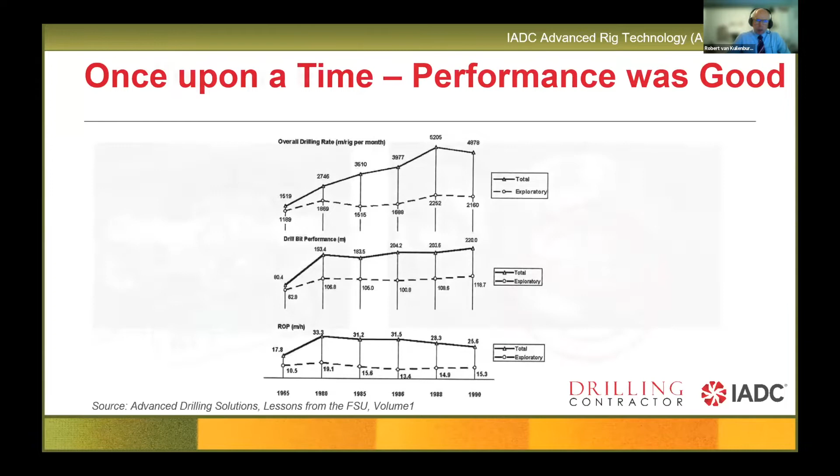So with that out of the way - once upon a time, performance was good, with drill bits lasting a whopping about 721 feet per run, and grading was easy. Now performance is around 5 times better. However, grading became simpler... well, not really, I guess.

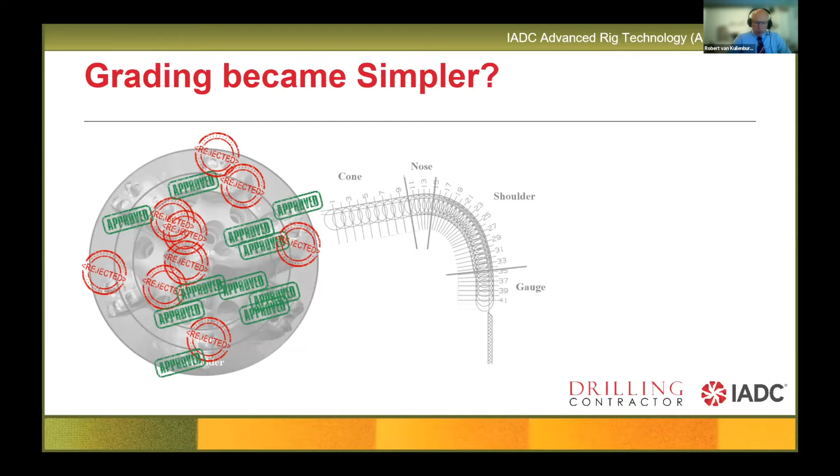So about 2 years ago, IADC, with the enthusiastic support of Paul Pastusek - I'm not sure if it was the other way around - recognized that the existing bit dull grading classification needed to get a major upgrade to prepare for 2022 and beyond. The identified limitations of the current IADC bit dull grading revolve around 5 core areas.

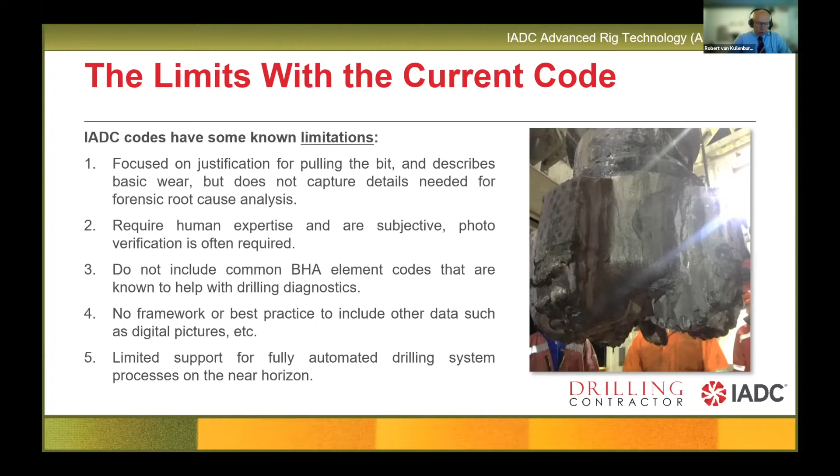It was heavily focused on justification of pulling and not on the root causes. A heavy reliance on human expertise, not including common bottom hole elements, no framework for metadata inclusion, and no or limited support for automated drilling systems. In short, the current system just didn't cut it in today's environment.

So in 2021, the IADC bit dull grading upgrade project set out with 4 major objectives to improve on the 5 identified limitations: support root cause analysis, and by virtue of this, continuous improvement; eliminate subjectivity, or the human element in most cases; support both human and automated systems, and fully embrace the digital world.

And as a note, the improved code set will be backwards compatible with the existing grading system, although it will then lose a lot of its detailed analysis functionality there.

So where are we in the timeline? The existing standards were created in 1987 and then revised in 1992. For 29 years, nothing really changed until January 2021, when this project kicked off with the first virtual panel meeting. And in August 2021, an intermediate update was presented.

The plan is to put the new standards out for trials mid-2022, and by the end of this year, have a final consolidated document out for comments.

And you might ask, oh, it is all virtual meetings. Well, no, you will see that in the next hour and a half. In the background, there have been more than 100 sessions on the sub-teams, which I will present later on.

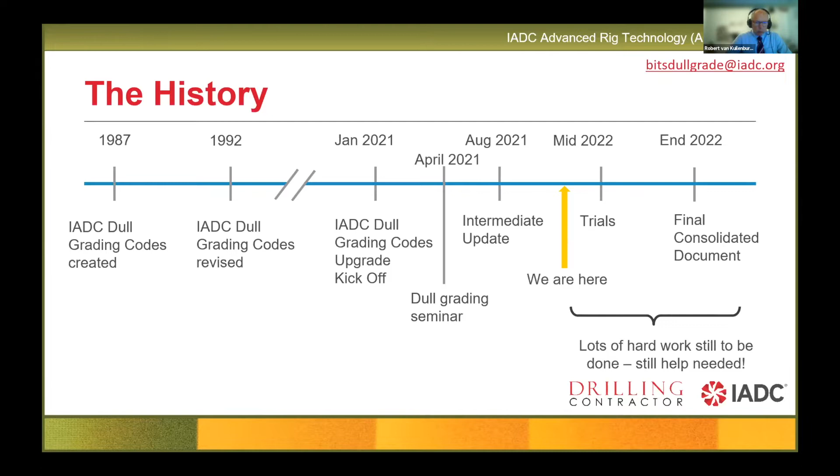A major part of the project was and still is education. I think I can speak for all volunteers that everyone learned a lot along the way. And you will notice this as well in all the presentations of the teams later on, that really high quality work has been delivered.

So the work has been divided into 4 groups: drill bits, bottom hole assemblies, case studies, data storage and retrieval. The drill bits team was led by Dustin Lyles, Tom Roberts, and Chris Probst. The bottom hole assembly team was led by Paul Neal, Roland Ilerhaus, and Jim Oberkirchen.

Case studies team was led by Willie Watson, Fred Dupree, Isabel Witt-During, Rafet Abbas, and Ty Cunningham. The data storage and retrieval effort was led by David Shackleton, Kyle Grant, James Ney, Nathan Zanero, Daryl Fett, Tartan Collier, and Jonathan Sharp. And deliberately, the leadership team bar has been placed underneath the teams.

The teams is where the work is actually being done. The leadership team just provides the proper foundations and ensures that there are minimal overlaps in the work. The leadership team comprises of Paul Pastusek, Dustin Deschel, Robert McMillan, and myself, Robert van Kallenberg.

Do we have industry support? I might be inclined to say we do. This is one of the truly collaborative efforts in the industry today.

So deliverables of the project can be placed into 3 buckets: outreach and education, codification, and digital guidelines. This year, we will see a lot of effort focused on the outreach and education. Writing a standard is one thing, but actually getting it generally accepted by the industry takes a lot of time.

Diving a little bit more into the outreach, you can see we have been quite busy, and I can invite you to the IADC SPE International Drilling Conference and Exhibition, where this group is presenting 3 papers, and more are planned this year. There are also preliminary thoughts on widening the outreach to universities and colleges as well.

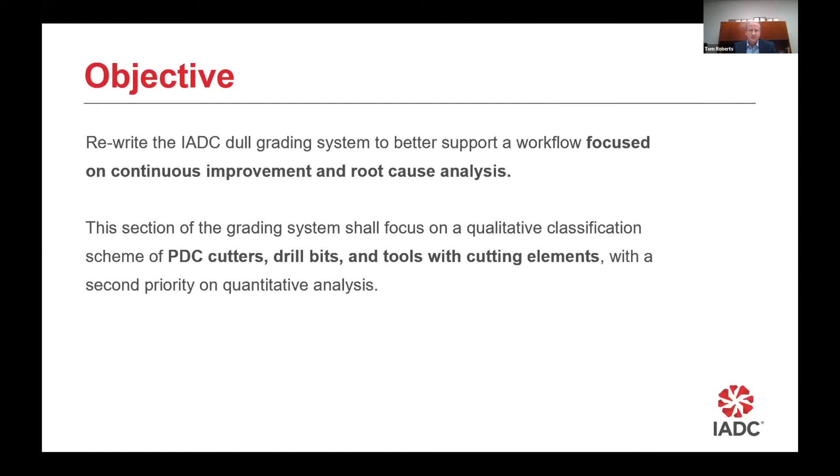So our objective was to really rewrite the IADC dull grading system, better understand and support the workflow focused on continuous improvement and root cause analysis. This section of the grading system will focus on a qualitative classification scheme, focused on PDC cutters, drill bits, and tools with cutting elements, with a secondary priority on quantitative analysis.

When we think about the IADC system today, it's been almost 3 decades since we've done a major rewrite of the system. Back then, the market was very different. Roller cones were king of performance drilling, probably 80%, and PDC drill bits were in their infancy. Over time the tables have turned, and PDC drill bits now lead at least 80% of the market.

So our focus, quite rightly, was on PDC drill bits. However, we want to make it compatible with roller cones, reamers, under reamers, hybrids, etc. We believe the existing system of grades works very well for roller cones, but there are a lot of new upgrades in technology to bring PDC good forensic analysis.

So again, just to highlight, we've defined a set of standards. We've focused on the cutter classification codes and documenting those codes. I'm not going to go through all of these points here, but you can see some of the areas that were laid out from the charter statement.

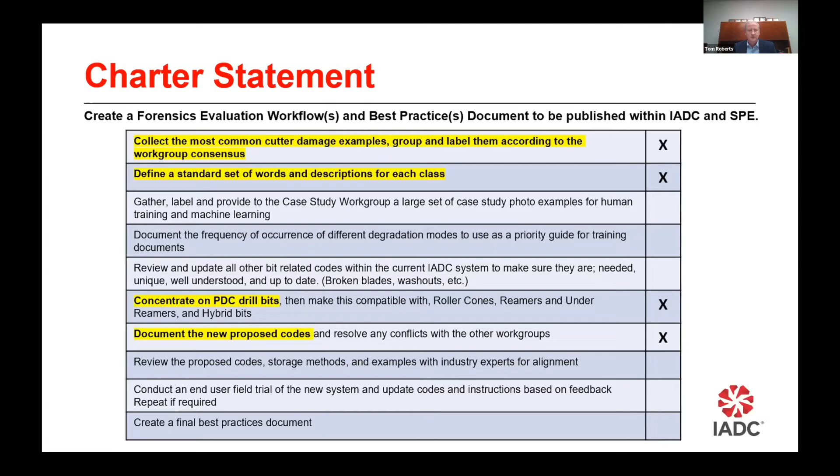This really is just a quick overview of where we are right now. We had a large group of subject matter experts kicked off at the beginning of 2021. We've had around 20 meetings, 17 with the SMEs, and at least 3 with the leadership group: Paul, Dustin, Robert, and Robin.

We've had really good attendance at these meetings, typically about 30 to 50 on each. These were run every 2 weeks, early morning. And as you could expect with so many subject matter experts, there are some strong feelings or strong opinions, one way or another.

So we made extensive use of polling. This helped us get the general opinion direction that we needed to go. An example here I'd just like to share with you.

At one point, there was a lot of talk about forensics, and sometimes it's not as easy as we all believe it will be. A lot of this, of course, is to find the root cause and figure out what's going on. In this situation, we would poll the group and ask: do they believe this is mechanical impact, thermal, or a combination of both? Quite rightly, the result shown by the orange bar, the majority said this was thermal.

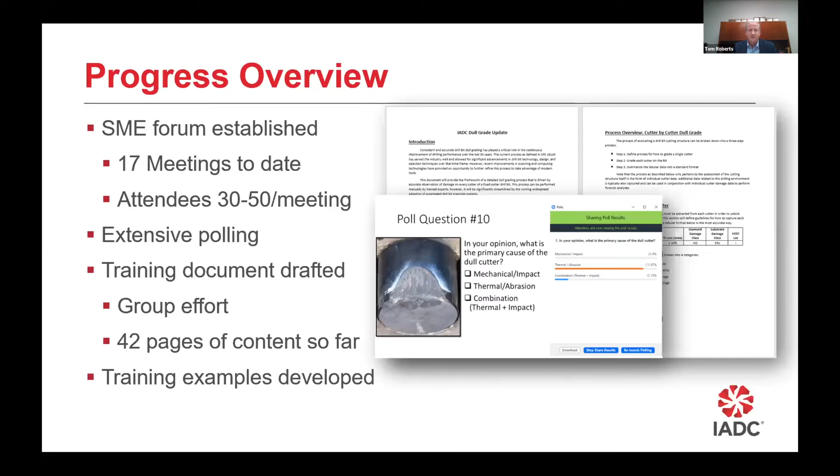So the point of this type of polling really was to show that it's very important to get to the root cause. A lot of energy and effort needs to be put into that ahead of time to really understand what we're dealing with. This will allow us to make the best decisions moving forward, what we do next.

So in terms of where we are right now, we've created a training document. This has been drafted with, and I'd like to really thank, the subject matter experts we've had. It's been a group effort for sure, and I'll let Dustin talk a little more about that. We have about 42 pages of content so far, and right now we're working on training examples so we can utilize some of the new classification codes that have been created.

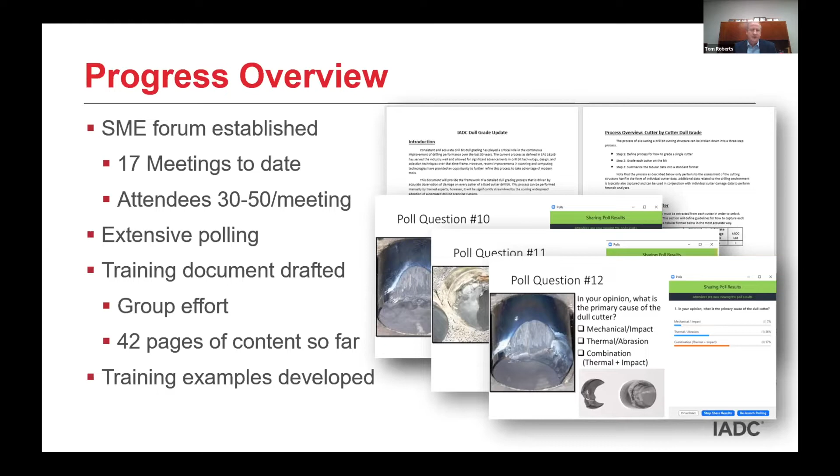Then we have automated systems being developed to machine learn using cameras and scanners. Even iPhone apps are being developed where they can photograph the drill bit, create a 3D image of that bit, and understand the grades. So these systems are being developed.

There's been a lot of work in this area in the last couple of years, and a lot of progress. I'd say in the next couple of years you're going to hear a lot more about these. They're developing fast and are very close, though a lot of refinements are still necessary.

And then finally, there's the shop grade. Again, this is really what we do today in terms of more advanced forensic analysis, where we do the typical cutter by cutter, individual cutter data analysis. So both the machine learning and the shop grade do the cutter by cutter, which will feed through to an IADC shop grade.

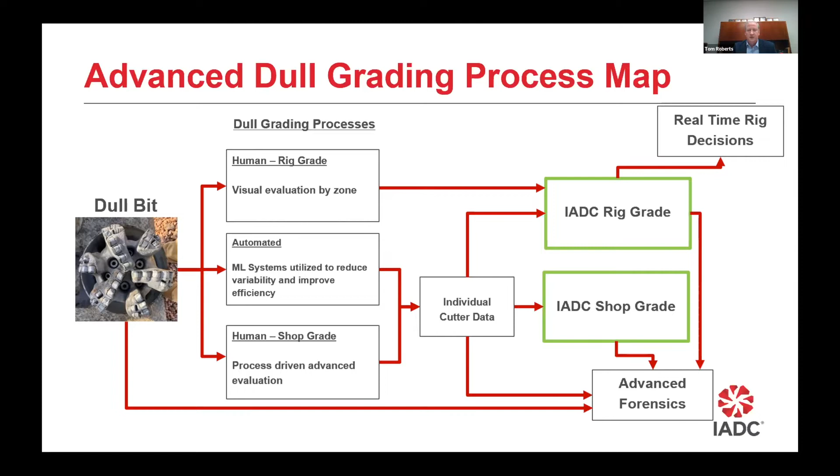We're looking to split the grade into a rig grade, which is still similar to what we do today in terms of grading at the rig, and a more accurate forensic shop grade. The importance of the two is that the rig grade provides real-time decision making and is still extremely important, but both will come together in terms of advanced forensics.

Like I said, we're working on these training examples right now. If we walk through the three steps, the idea is to grade every cutter that we're dealing with for greater accuracy, starting by defining the process of how we grade a single cutter.

Dustin will be talking about some of the key achievements and changes we've made. Then we move on to grading this into the chart you see, the second stage on the right here, looking at the percentage of diamond table that's been lost in this column.

Then we have the new diamond classification codes being provided, showing whether it's a worn cutter or damaged by spalling, etc. We also have new classification codes for substrate damage, which can be related to corrosion, erosion, etc. And then we have the IADC location relating to the existing system.

From this, we can summarize the results into the cutter damage severity, as you see in the third section below. This gives us the overview, the zone - the cone, nose, shoulder, and gauge - and then whether we're looking at the primary cutting damage category or the secondary damage classification.

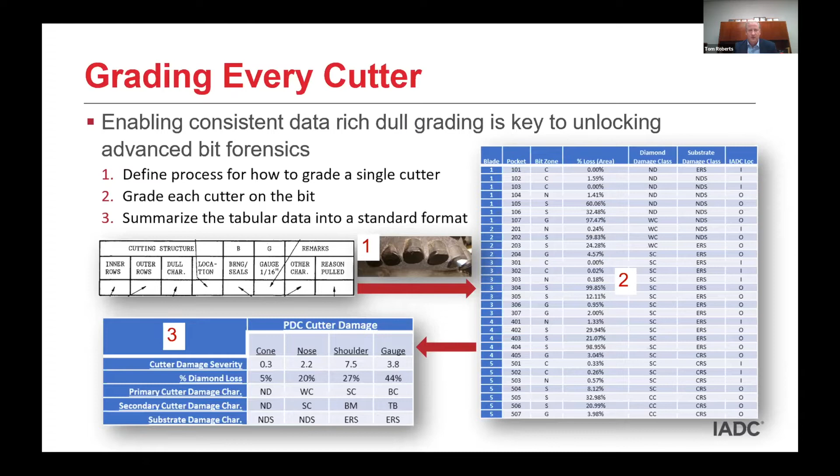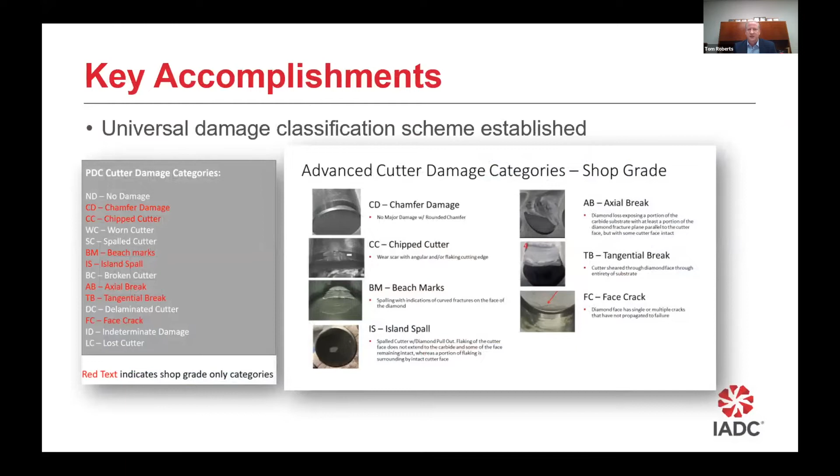Thanks so much, Tom, and good morning to everybody. So we'll keep rolling here. I'd like to hit on some of the key accomplishments to date for the drill bit group. One of our first tasks was to completely overhaul the damage classifications or categories.

The old system we all know of was updated in 1987 to incorporate fixed cutter bits. It listed 26 dull characteristics, but those were very general, and the majority were actually more focused on roller cone bits and did not do a very good job of giving us granularity or detail on the types of damage predominantly experienced on PDC diamond table.

So our newly proposed damage categories are focused solely on PDC damage. This is not a comprehensive list we're showing here, but it does highlight some of the more noteworthy and new categories. You'll also note the more detailed shop grade categories in red.

As Tom mentioned, we have the rig grade and the shop grade. The idea, at least initially and subject to change as we do our field trials, is that we don't have as comprehensive a list at the rig level, so as not to overwhelm them. But as we get into the shop grade, we have a more comprehensive list that gives a high level of detail and a lot of options for the automated machine vision based systems, as well as when we have engineers evaluating dull bits at their local facilities.

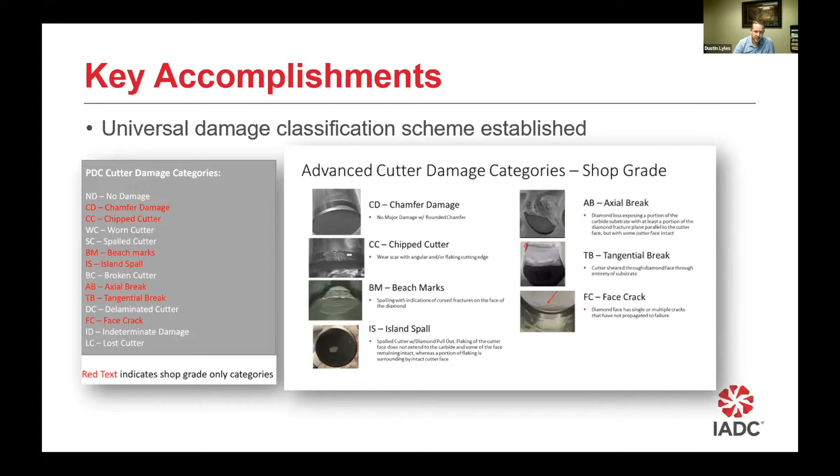A couple others that are interesting there - face cracks, and then the beach marks, which have a very specific shape to the type of spalling you're seeing. That's indicative of the type of loading that would be seen. So these are some of the more noteworthy damage classifications, not the exhaustive list, and we're continuing to develop and will likely iterate and improve upon these and add additional categories as we get into the field trial stage.

Thank you, Tom. Moving on, another key accomplishment here would be looking at the wear severity measurement system, as well as including a category specifically to evaluate the substrates on the PDC cutters.

We also included eroded/corroded substrate because a lot of times we see that goes hand in hand, especially in a lot of West Texas applications today. And then leaving in the heat checked substrate, as well as a category for no damage to substrate, which is also important - we want to know when there's damage, we want to know when there's not.

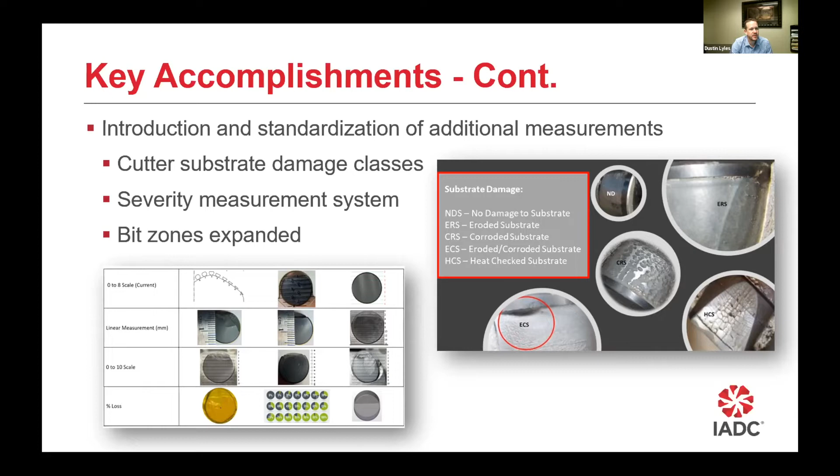Next, we'll transition into bit zones.

I'm going to get into subgroups a little bit more in a subsequent slide, but the majority of this work was done predominantly by one of our subgroups. And it, I think, is another really critical component to improving our understanding of drill bit damage and driving to that root cause failure analysis.

We typically, or historically, used an inner 2/3 to outer 1/3 system, which was very applicable to roller cones and makes sense, but was really not very applicable to a PDC bit and didn't do a good job of allowing us to understand what type of drilling dysfunction or loading would have caused damage in specific portions of the profile. So we're now transitioning to 4 sections, going from inner-outer to now cone, nose, shoulder, and gauge.

The cone being that arc or that line in the center, and then the nose being, if you were to place a clipboard or a flat object on the face of the bit, it would be the cutters on each blade that would touch that flat object. So really the best way to go about this would be to have that flat object on top of the drill bit, identify your nose cutters, move further out, identify the gauge as the first cutter aligned with the top of the gauge pad, or running parallel effectively to the gauge pad.

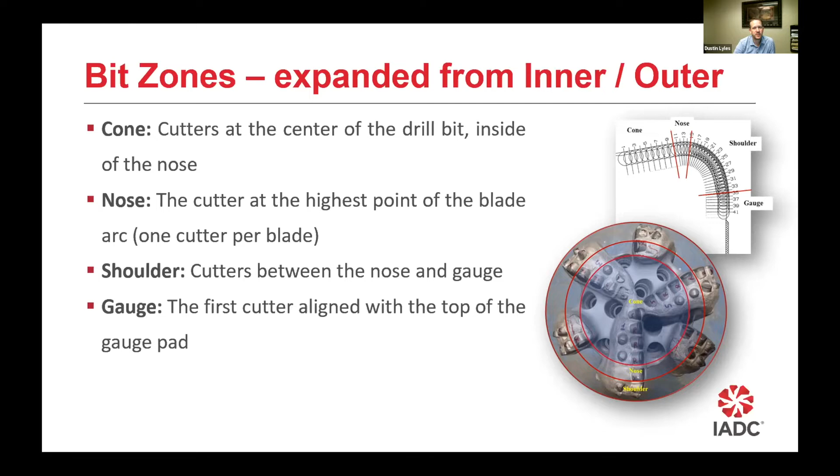But we believe this type of improved granularity into the drill bit zones will give additional color and feed that digital feedback loop to drive to root cause forensic analysis.

All right, so on the additional considerations and subgroups, as we mentioned, we had an extensive subject matter that needed to be addressed within the bit group, and we decided it was really too much work for us to take on just within the meeting. So we divided that up. We actually ended up with a total of 10 subgroups made up of 19 individuals.

For the sake of time today, I'm not going to go through that list of names, but you know who you are, and we want to tell you we sincerely and greatly appreciate your participation. Without you all, we would not have made the progress that we have to date. The 42 pages worth of documentation that Tom mentioned earlier is in large part thanks to these subgroups. So thank you all for that, and we will continue to deploy that model, splitting up this work.

So just to hit on a few of these, we've already kind of gone over the drill bit zone definitions. Shaped cutter compatibility was obviously a big one. We know in the industry today, over the past 3 to 5 years, the utilization and deployment of shaped cutters has increased substantially, and so we have to make sure that the new system can adopt and integrate wear severity and damage classifications for all varieties, of which there are an extensive amount in regard to geometries being run out there today.

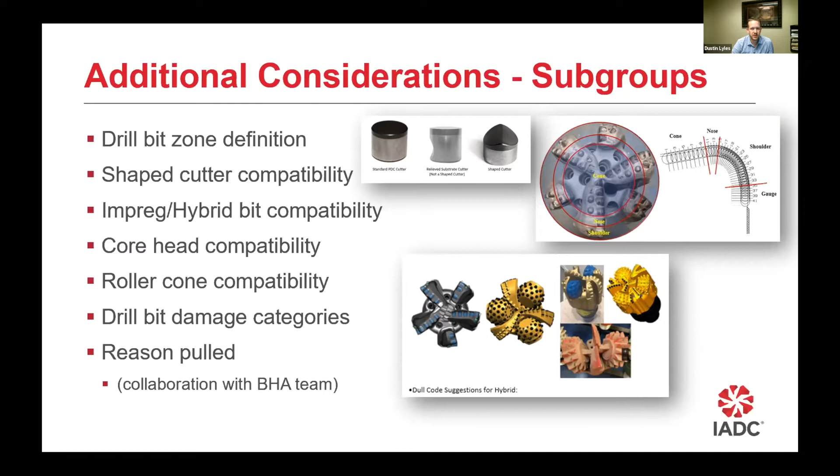We also had a subgroup that was specifically focused on drill bit damage categories. And then the last one shown there is reason pulled, which is in collaboration with the BHA team, and Paul Neal will be talking about that in a subsequent slide deck.

So to end, next steps. First, as Tom mentioned, we've been working in the background on the 6 training set. We will be moving forward with field trials towards the middle of this year. To date, we have about 9 bits set up to run through testing, and get everybody to try to grade these on a cutter by cutter basis, as Tom showed earlier, using the damage categories and wear severity measurement system we previously discussed. After that, we'll take whatever feedback we get, revise, and continue testing.

We'll do some field testing. We'll do testing within shop type environments, so at the bit companies or BHA companies, and get that feedback, which will be critical for us. We want to make sure we've had every opportunity to gain feedback and improve upon it before we finalize.

After that, we'll review the instructions, update as needed, and we're going to be working extensively—we've already started discussions with the data management team to develop the digital interface for the daily drilling reports. With this new system, we're going to need a way to capture that data digitally, and that's where we'll have a new interface to ensure all the desired fields are in an appropriate format that works for everybody out there.

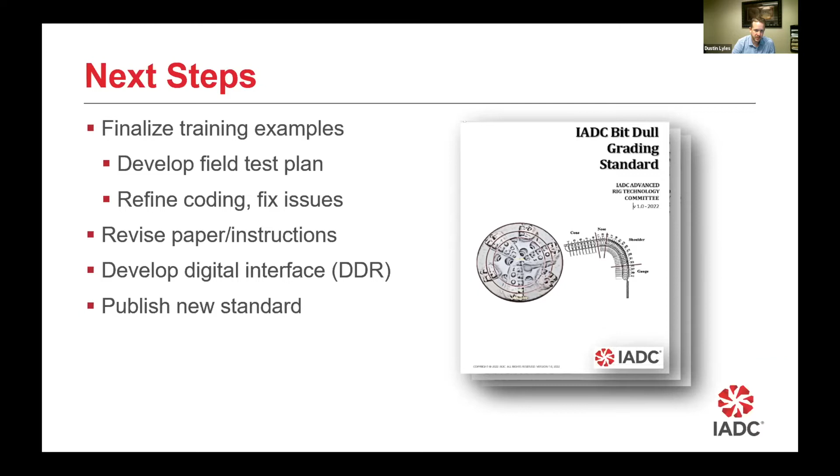From that, we'll move towards publishing the new standard. As you can see there to the right, we borrowed an image from Robert's presentation to show what that will look like as we move forward. So we're looking forward to that, and we appreciate all the support and help from everybody thus far. We look forward to the continued work on this project.

And so at that point, that's all we've got on the bit side, and we'll move it on over to Paul Neal with the BHA group. Thank you all very much.

Good morning, everyone, thank you for joining us today. My name is Paul Neal, and I'll be presenting on behalf of the BHA group this morning. Our group has quite a good spread of different parts of the industry. We've got about 30 members assigned to the group. We have people from the service company side, the manufacturing side, operator side, contractor side, and we're spread across about 7 different countries, so we've got a pretty good spread of people supporting this initiative.

We're really excited to show you what we've got today and what we've been working on for the last 9 or 10 months. We believe there's good work done. We believe the initiative is good, and it's going to be a tremendous help, not only as a diagnostic tool to evaluate the condition of the BHA after it's been run, but also as a tool to help understand what's happening downhole and bring pieces of the puzzle on how we can drill more efficiently.

So just briefly, today's agenda: first, we're going to talk about the objective we're trying to accomplish with this initiative. We'll briefly discuss the charter, which is what we use to drive direction when conducting our meetings. From there, I'll discuss the work group structure, which will give you an oversight on how we divided up the BHA, and subsequently the teams that were built to create those codes. From there, we'll go into detail on the coding structure itself, giving insight on how we're going to grade and what the grading system will look like.

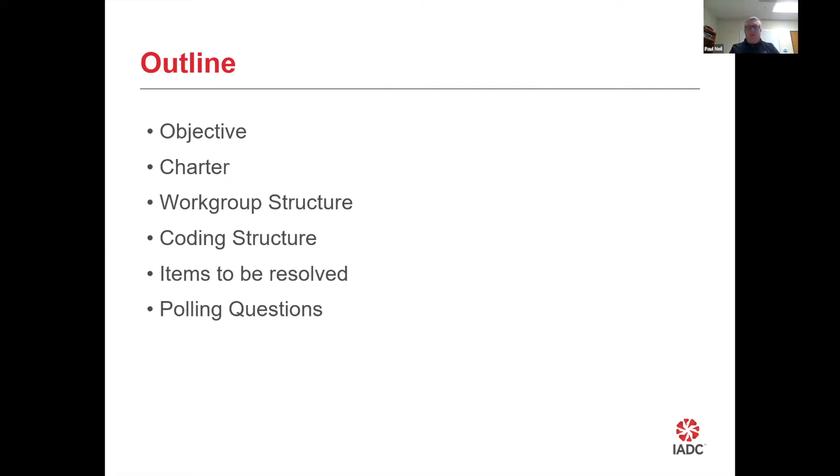Our objective is essentially to establish a set of coding standards to support the workflow that will contribute to a better way of doing and diagnosing drilling mechanics. The focus of the system will be...

to break out the BHA into different components: motors, MWD/LWD equipment, rotary steerable tools, performance enhancement tools, and then stabs and collars. The bit dull grading system has been around for decades, and it's been adopted globally and has served us very well in creating a picture of the condition of the bit once it's above rotary and it has been run.

And it's been a critical tool in improving drilling performance. But there's nothing been done on the BHA side, right? Tom and Dustin talked earlier about how they're going to be improving on the bit system. But we felt it was important for us to create a system that formally captures this from a BHA perspective.

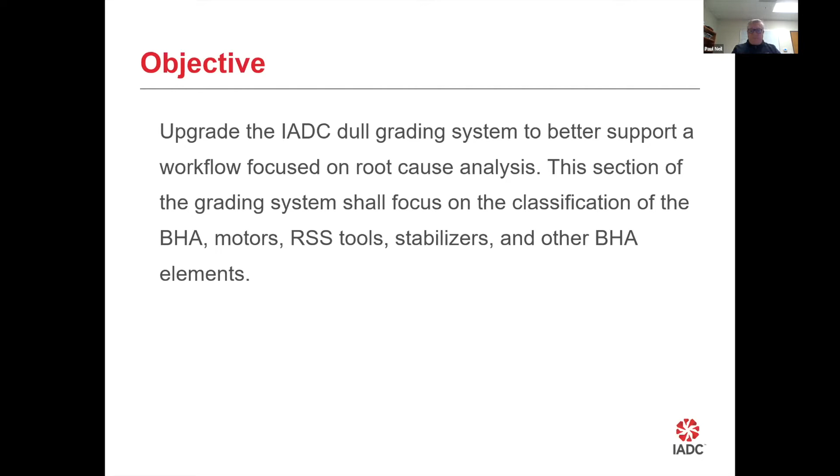So our goal is to essentially create that system and implement it and drive it forward. So our charter statement, basically this is kind of an overview of our charter statement, and we use this to guide us and direct us through our processes and conversations. There's four main pieces that I want to highlight today with you all.

First and foremost, we want to create a forensics tool and a best practices document that we can use for BHA code. This will show how the tool is to be used, how the coding will work, and define the boundaries within the system. This will be published within IADC and SPE.

Next, we want to review and propose any codes that can be used to describe the condition of the BHA and help diagnose downhole tool conditions and events that will happen when the tool is below rotary table. The intent here is not only to look at codes that can be attributed to BHA, but also codes that can be used for the reason pulled category, as Dustin mentioned earlier.

So we want to use existing codes, and we want to create new ones that will actually paint the right picture moving forward. We're looking to develop an archive of case studies and photo examples that can be used for training purposes and as guidance when doing the BHA dull grading.

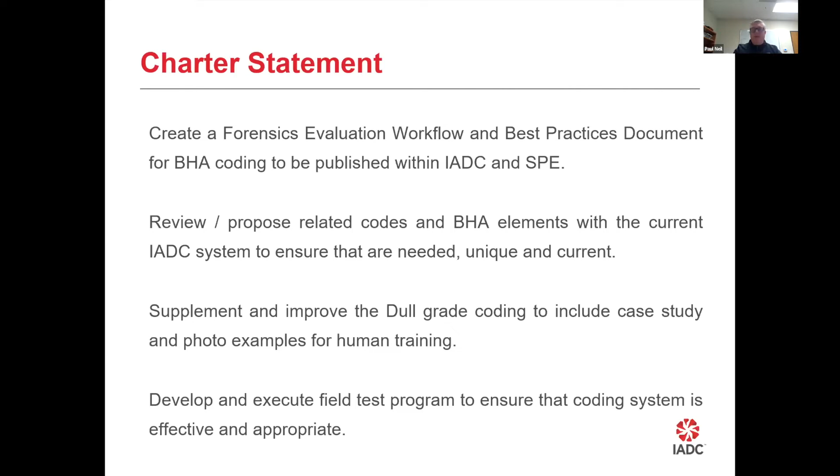So basically at the highest level, we want to create an effective BHA coding system, develop the support that's needed, field test it, and then roll it out. So the work group structure basically is what we're using to break up the BHA codes.

We quickly realized that one coding system wouldn't be very effective in coding all BHA components, and it'd be too cumbersome and difficult to use. So we decided to break the BHA up into different subgroups.

We felt that this would allow us to develop codes more specific to the product and would allow the user to break up their evaluation a little more efficiently. So of the 5 groups, the first group was the motors group.

And basically the way their system is broken up is they broke up the motor into different assemblies, which you'll see later in the presentation. This will allow the user to code different parts of the motor, such as the power section, transmission, bearing assembly, and so on.

Next is the rotary steerable group, and basically they've developed codes not only to give a picture of the condition of the tool, but also codes related to steering functionality and data transmission.

The data acquisition group focuses not only on MWD/LWD equipment, but also equipment that's tied to capturing drilling mechanics data. Their coding system will allow for observations related to condition of the tool, but also associated with sending and receiving data. The performance enhancement group will cover technologies such as vibration mitigation, friction reduction, jars, and so on.

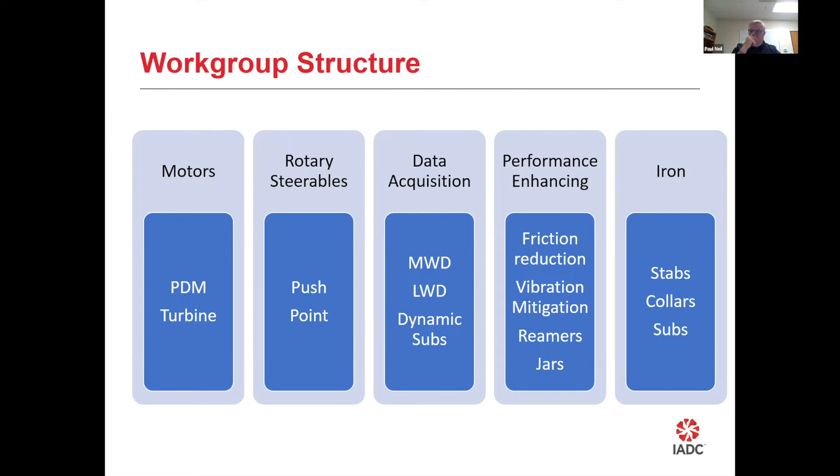Similar to that, codes that are used in the data acquisition group would also carry over to the rotary steerable group with anything that has to do with data transmission and so on. So that's essentially how we broke up the different parts of the BHA, and the next few slides will go through the structure.

We broke up the project into two phases. Phase one is the one we're primarily focusing on right now, and phase two is more of a future phase that will be implemented once phase one is underway.

From a coding perspective, we've divided up into 3 levels. The intent is to give the user different level details on the condition of the BHA. Level 1 is a high level code, fairly basic.

It's essentially part of the run report, and it will quickly flag any issues with a part of the BHA that requires review and investigation. Once the BHA comes above rotary, you look at it to say there's something that doesn't look right here, we need to look into it more, or something that doesn't look normal, and we flag it for investigation. So it's a quick look.

Level 2 is more of an in-depth look. The intent here is to observe and document the condition of the tool and to help diagnose borehole conditions or the drilling environment.

This is where the different groups come into play. Each BHA component will have a separate level 2 coding structure, as we previously talked about. The coding exercise would be done separately for the motor, then a separate one for the MWD, and so on.

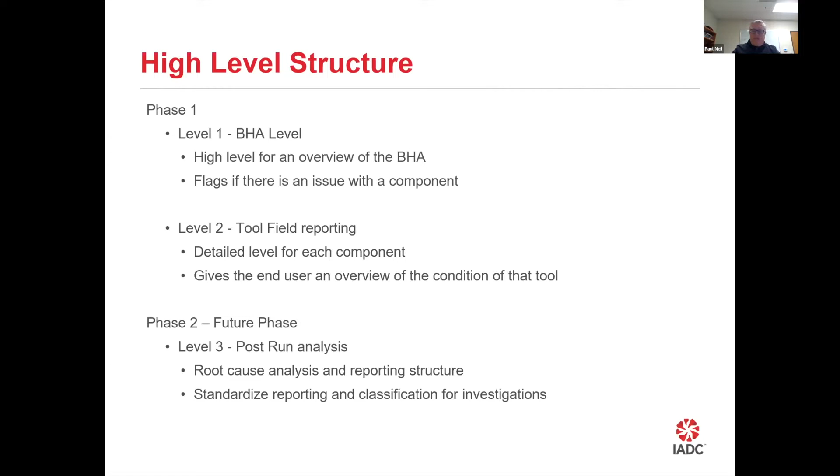If you look at level 1, to the left is an example of a run report, but to the right in green you can see the mock-up of a level 1 report. That level 1 report would basically be embedded inside the drilling report. On the left you see the different parts of the BHA - bit, MWD, PDM, and so on.

Just to the right of that, you'll see some preliminary information - serial number, OD length, and so on. Right below that, there's additional information for drill pipe, reasons pulled, and BHA performance that can also be added to that portion of the report. But right now we're just focusing on the top.

Next to the BHA components is the level 1 grading system - again, it's a quick look for any issues. We use a designation of OK to show there's no major issue with the tool, RI designates requires investigation, and N is a note to say that element wasn't run in the BHA. We have 6 main codes to detail the primary area of concern: back off, washout, cracks, belled connections, fracture, or other.

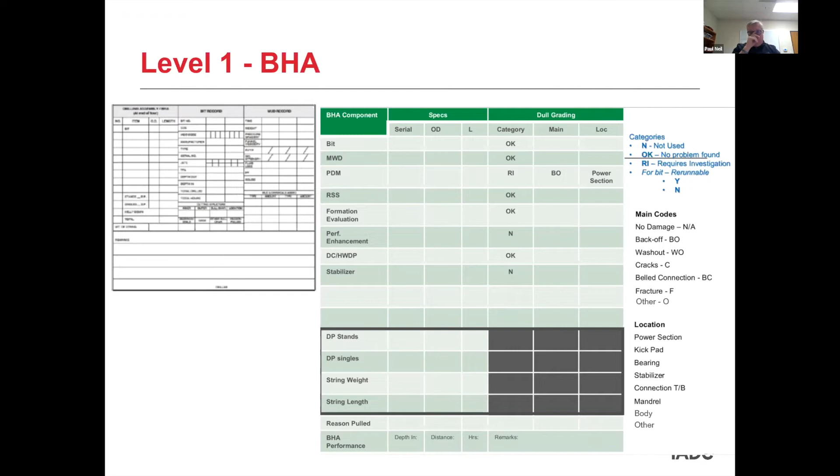So now we're going from level 1 to level 2. Level 1 was the high level overview, level 2 is basically the coding system you'd use to code the motor itself. What the motor code looks like is different from the MWD, and slightly different from the rotary steerable, but this is basically a picture of the motor.

For the motor coding, we've broken the motor down into 8 different sections: the top sub, the power section, transmission, bearing housing, stab body, kick pad, bit box, and the stabilizer blade.

So you would go through your tool and then you just plug in the codes as needed, right? And then to the right, there's a section that does field observation.

Basically it's an additional section where you can add more information. For example, issues with the power section not draining, free rotating or locked up bit box, stalling, issues with directional control, power loss, chunking, or issues with bearing play.

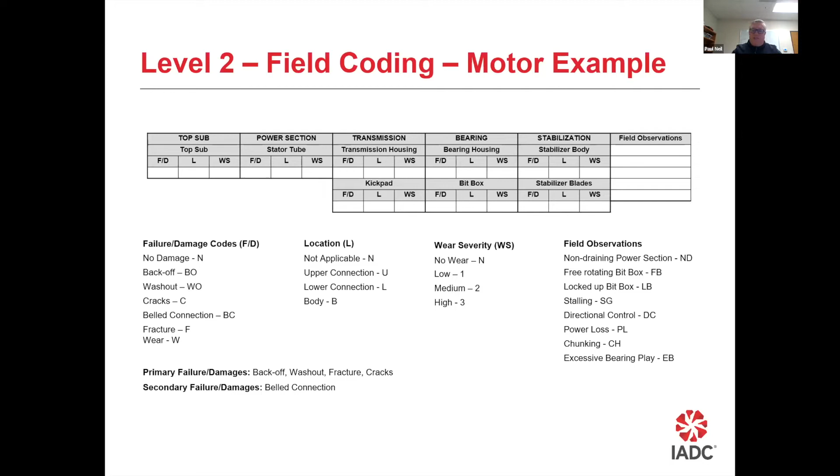So if you look at our previous example, we were looking at the back off incident. We would go in, and when the tool came above rotary, there looked to be a back off. So the user would go into the power section portion of the code and enter BO for back off. For the location, it was the lower connection, so they'd enter L for lower connection, and WS would be a 3.

And then subsequently, going through the BHA or the rest of the motor, they noticed maybe there was a crack in the body of the kick pad. So they would go in and say there was C for a crack, location would be B for body, and wear severity would be a 3. If anything was noticed as part of the motor, they would just input that into the code.

And then during the run, there was some power loss and some stalling, so they would put in PL for power loss and SG for stalling. Once the motor was done, they would go on to the MWD, fill out something similar to this, and so on and so forth for the rest of the BHA.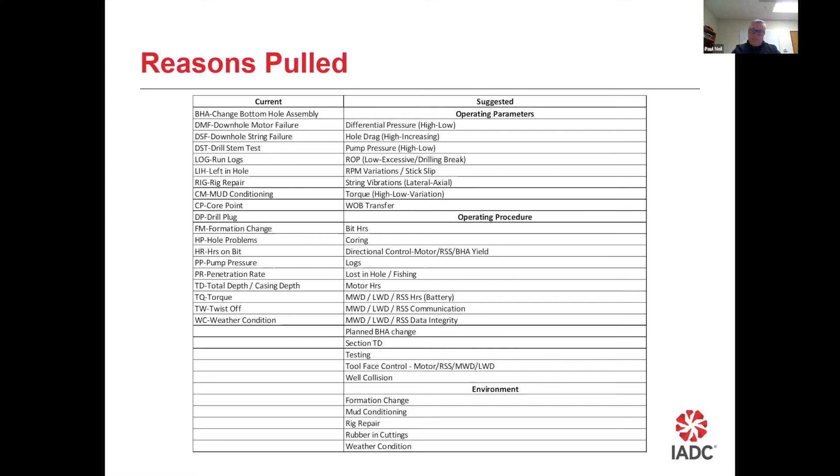So to recap, we've created 5 different groups that we felt could be bundled together from a coding perspective. We created the codes within each group, and the intent is to individualize the structure to give each portion of the BHA a better level of detail when doing the codes. We're focusing on level 1, used to flag, and level 2, which is more detailed. We've also added 13 new reason pulled categories, and today we've established about 50 codes so far. I think once we start the field testing process, that's going to change slightly, but we'll see how things go once we start field testing.

With respect to what we have left to do, we've done a lot of work so far, but we have quite a bit left. We've got to finalize the field codes for the remaining groups, making sure we capture as much as we can before we hit the field test. We'll continue to collect examples for the case studies group—there's still quite a bit of work left here before testing, and I think once we start field testing, we'll collect more and more examples. Working with the digital team, we want to make sure the digital interface has been established, with a proper structure for archiving the data, so we can retrieve it when needed and that data brings value.

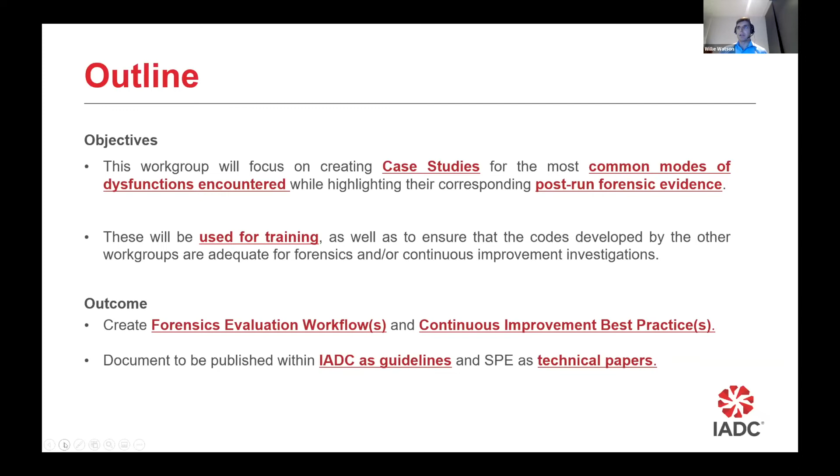This will come through SPE technical papers and also the IADC guidelines. So where do we fit in? We've heard already today through the drill bit team and the damage areas they're looking at from the BHA team and how that comes together. We will soon be hearing about the data collection team, surveillance. What are the elements that can be linked together?

Something we start to see when we investigate some of the damage causes is that a lot of the damage can be caused by specific types of drilling dysfunction. If we have an ability to pull this together by combining the damage forensic evaluation with the actual conditions that the drill bit and the BHAs have been exposed to, that can help us diagnose the failure.

And with that, we can implement real-time changes that the driller can take part in straight away to try and change that environment. And certainly as we go forward, take a systems approach and look to go through and redesign the system.

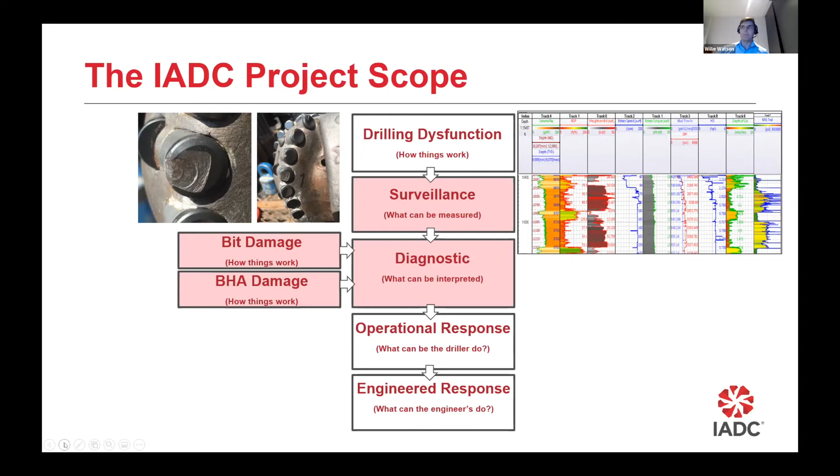So in essence, where we come in from the case studies is really focusing on that diagnostic part, linking the damage to the information that we have.

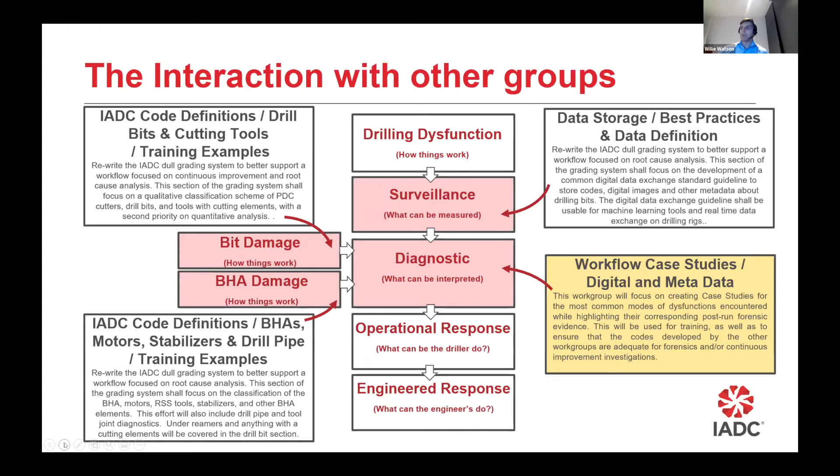As we came together through last year, we started to reach out to the community, to a group of different individuals that's been looking at drilling forensics and drilling dysfunction. We put a number of polls out and identified the main forms of damage being seen to date across the industry worldwide. These were some of those that came back for bit damage and BHA damage.

If we look at a high level, a lot of the damage, particularly BHA, the top three relate to whirl and lateral vibration. We see a lot of torsional vibration coming through as well, whether it's HFTO or stick-slip down through the bits, and a number of other areas too—transitioning through hard transitions, tangential overloads, and the like. So our purpose has really been to explore these areas, map them through, identify and create training material that can help the codes as we go forward.

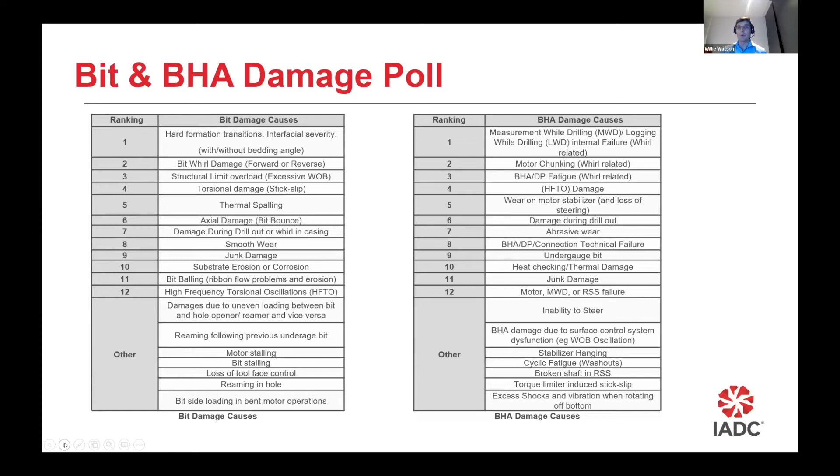Very early on, we start to ask ourselves, what does a good case study consist of? Within the industry, we can see some salesman elements coming in, like if we use this type of additive or this type of cutters, we can drill faster. We've been looking to explore further: why has the damage occurred, what were the conditions that caused it, and framing that in a way that can be passed on to engineers so they can understand the conditions and use that understanding to improve their future performance.

The process we've adopted as we come through the case study group, meeting regularly through the course of last year: we identify a case study, or if someone's got a point of interest, some photos, some observations from the rig, we pull that together into a presentation, make sure we've got the internal approvals, deliver it, and then take the feedback back from the SME forum.

As we heard earlier from the BIT community, there are some areas where we can quickly reach consensus. There are also areas where we're touching the bounds of industry knowledge. In this case, it's good - it can help us identify where those bounds are and potentially offer some different thoughts.

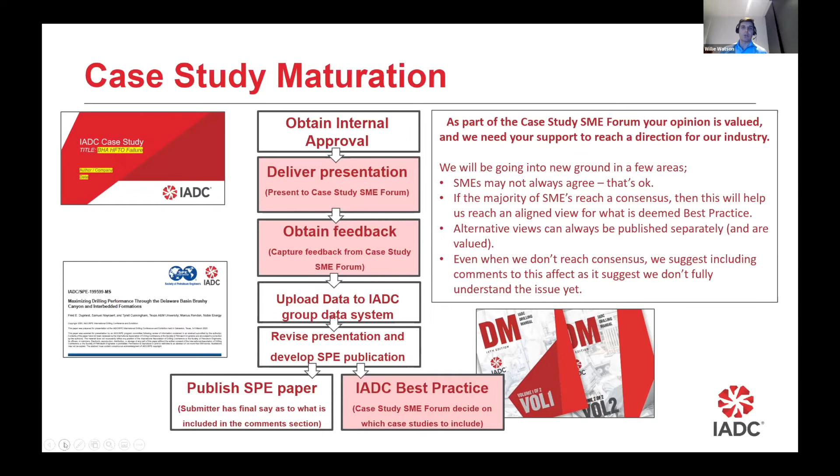Through our efforts in 2021, we delivered a total of 18 different case studies and investigations where we conducted drilling forensics on these different failure types. We also have two publications preparing to be released at the IADC conference in Galveston, and a number of presentations we gave there as well.

Let me talk a little bit more, give some insight into some of these presentations and publications that are due to come out in March. A little teaser, if you may.

When we explore with our forum of subject matter experts, we put out a poll. People were given time to come in and look at the case studies, and we said, you've got some special skills - you came here from drilling contractors, drilling operators, universities, bit specialists, a lot of background and different expertise. What's limited your ability to use your special skills? It's quite interesting seeing that come back.

There was a consensus around data - having the availability of data and the ability to process and filter it suitably. Second is time. That time element can equally be interpreted as: how do you take the process, how do we work through drilling forensics in a methodical way such that we can collapse that time?

Equally, training was quite common. People would see that as they come into drilling forensics, it's very easy to go down rabbit holes - drilling forensics can be a rabbit's warren. So we set out to target these, trying to create that link between analytics, engineering, and operations.

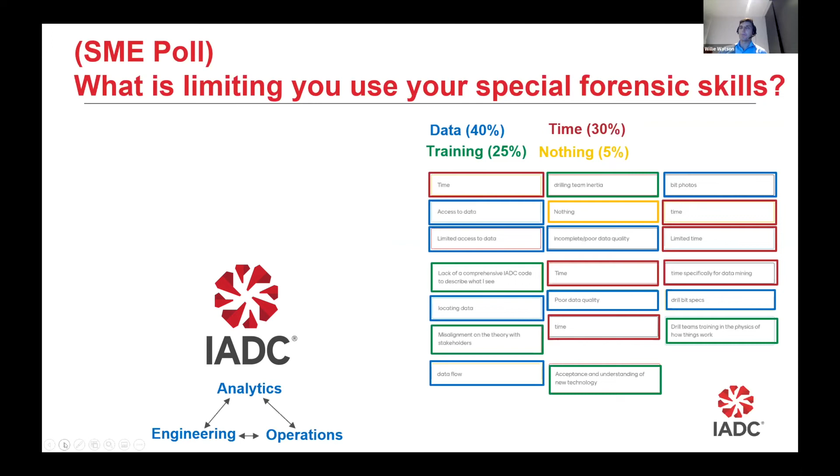What was interesting, as we start to see on the data front, we were dealing with common problems. Frequently, when we'd start investigating a failure or looking at different elements from forensics, we'd be asking for a little bit more information, and it doesn't take long before we're all dealing with information overload and swamped with data. But a key thing we started to see as we walked through a number of these case studies was that there was often a smoking gun.

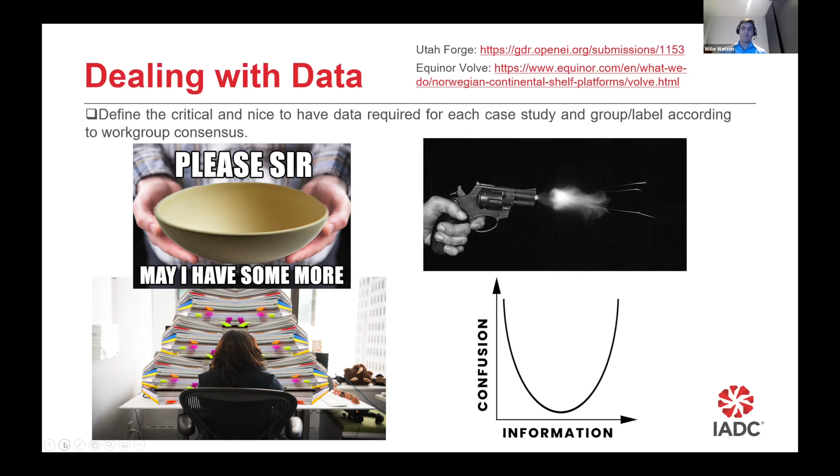And that's where we've been trying to establish and develop a process, how we can find that common balance between confusion and information, getting the right amount of information such that we can go ahead and take some decisions, diagnose, and move forward. So with that, that's what we've set out to do, specifically with one of the papers, the first paper that will be presented at the IADC conference.

We've mapped out for the industry potential data sources that can be considered and where they can be obtained from. Equally with that, we've provided a framework, a structure in how this data sources can be collated, compiled, sorted, and effectively processed through, so you can start developing some meaningful information that can establish and provide insights into what's drill bit forensics.

The second paper we've put together really is round about photo documentation. We've seen this picture, a picture may tell 1,000 words. Some pictures may tell more words than others. Unfortunately, that doesn't work in reverse. If we look at the IADC code, it's an alphanumerical code, and trying to convey with a limited set of words and numbers, the condition does have its limits.

What we acknowledge and see is that within industry, there's a lot taking place with regards to image processing and photo documentation. Advanced analytics are really looking at this from an AI perspective and will open a lot of new doors. But what we acknowledge is that if there's a standard process in how we recommend photographs to be taken at the rig site, this can certainly help with drill bit forensics also and provide that baseline.

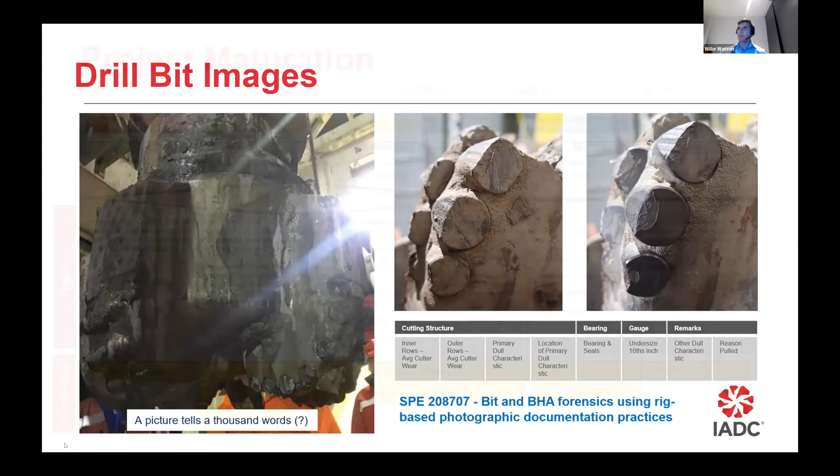So taking a high level overview at the project, if we look at the tasks that we'd set out for the case studies, the drilling forensics team, and where we see that in relation to some of the other elements, the other project teams that are coming together on this effort, we've seen that we've looked far, we've diverged out, we've looked at a number of different case studies and identified those common modes of failure. We're now starting to converge into our solutions and move forward.

And we will see that as the codes are coming through and refined. In the near future, we will soon be in a position to go through and deliver a pilot on these codes. With those coming through, we'll look to yourselves, to the industry, to provide feedback on that. And what we'd love to do is have the ability to see, for example, the photo documentation. If you can talk us through that, if you can follow that as we've presented it out, present back pictures, we'll learn from that and refine that and use that to help us refine the codes and the processes as we go forward.

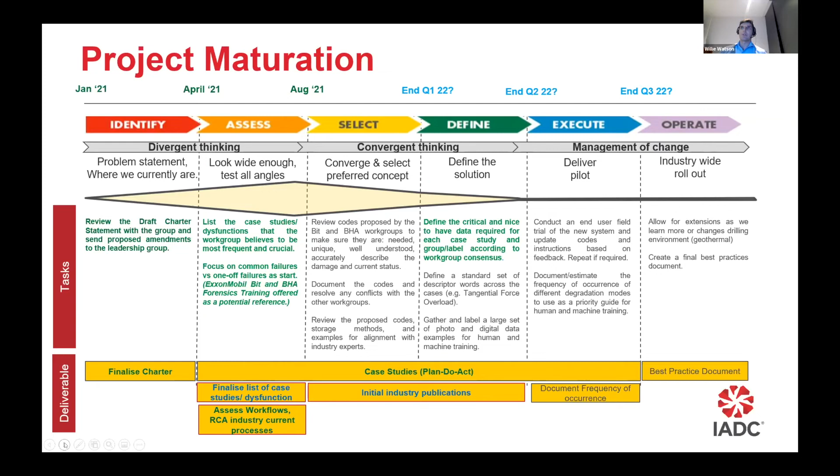So what do we have in store for 2022? We kicked off last week, Paul Pastusek took us through a great example with regards to whirl damage. And on the 2nd of March, we've got Fred Dupriest lined up there as well, also taking us through and looking at different cuttings and how the different rock types can impact the potential damage and returns we may see out there too, with Raafat closely following, coming on the 16th.

We've lined up also in the early works a 3rd paper, and that really will be focusing on surface and downhole data, the information that you will have at the rig site, how you can interpret that, some of the tricks of the trade, and how you can take that through and help support drilling bit forensics.

And as we start looking beyond that, we see that with time, we will naturally come through a transition and come to a product with the revision to the IADC code. The case studies it's been great, it's been energetic, but it's really opened up and provided the bedrock for what we may consider as drilling forensics. And with drilling forensics, we're starting to look at that. There may be some opportunities where we can consider that in the industry and look at taking that and making it evergreen.

If some of this is of interest to you, or to someone in your company, I'd suggest drilling forensics, where to start, do a quick Google search. Last year Paul took us through and gave us an overview of drill bit forensics, a great introduction to some of the common modes throughout.

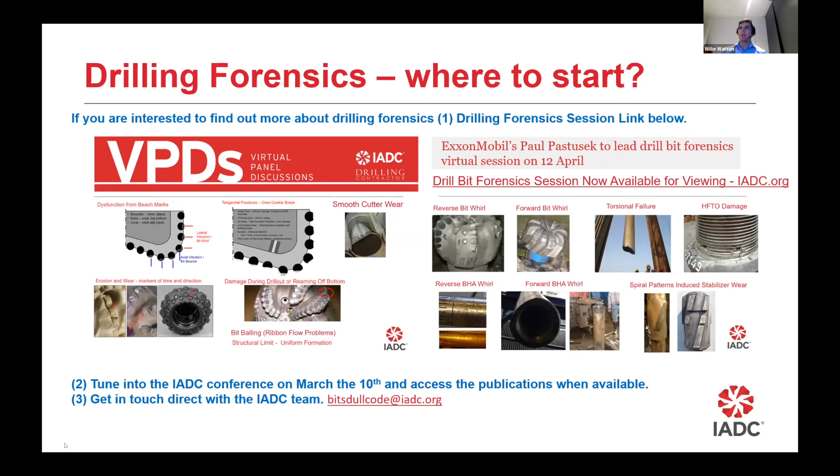Thanks for that, Willie. A lot of progress has been made here. I'm David Shackleton, presenting on behalf of the Data Management Work Group. We're about 35 industry experts from academia, large service companies, bit manufacturers, data collection, management and reporting and analytics companies, large operators, and of course the drilling contractors themselves.

Just what I'm going to talk about here: I've talked briefly about the team, which has been very supportive and incredibly knowledgeable. We'll look at what our original objectives were, review those, and look at the charter statement. We'll look briefly at the series of presentations we looked at last year, the on-paper distillation of that, the guidelines documentation, talk about the training data set, and next steps for this year.

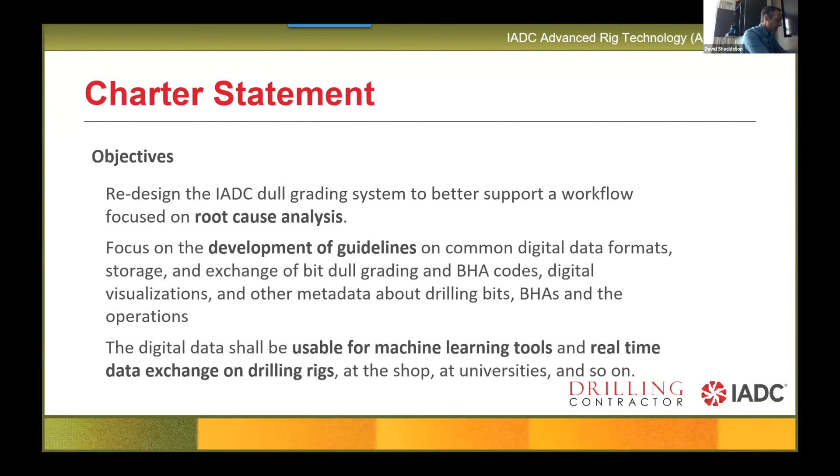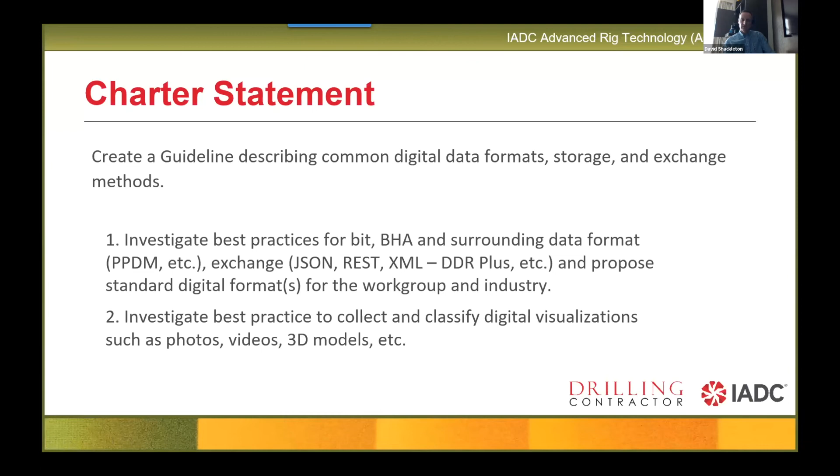So firstly, we started looking at best practice, what is currently done, what standards already exist, what other companies and people in the industry are doing, and what works best - which flows of data, stores of data work the best. We look at different ways of digitalizing the visualizations in terms of photos, videos, 3D models, and so on.

So let's have a look at that. Why are we doing this? We're focusing on the bit and the BHA, but also a lot of the surrounding data, data about that data, metadata, and the wider operational data connected to the performance of the bit and the BHA. Why? For reporting, for reviewing forensics, and optimizing the entire operation.

So the first part of the document looks at what is currently working very well, what's established, what standards are being used, and interoperability between those standards or using those standards. So firstly, we look at data storage and how that data is accessed, data structures, data model types, standards, existing standards like the well-established PPDM, WITSML data models, and data exchange protocols.

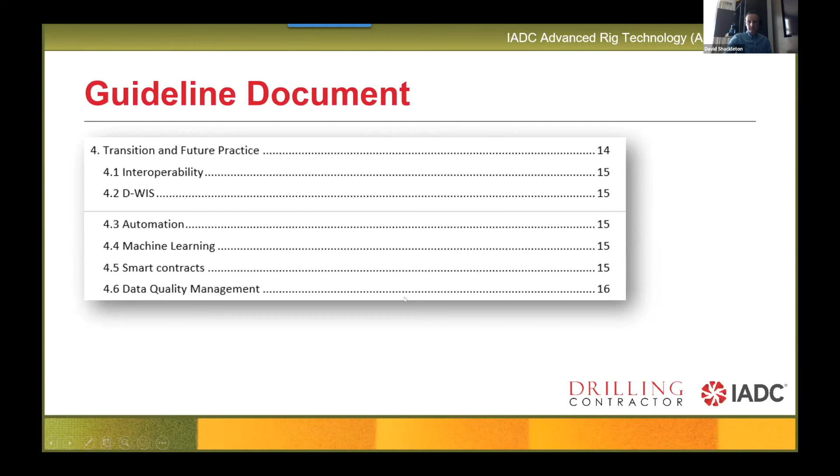And data quality management. So the last part of the charter statement was to develop this training data set that can be searchable, secure, accessible, and so on and so on.

And it's clear that systems like Dropbox, even commercial systems that are used within companies, if you've ever tried using them to collaborate between companies, half the people can't get access. It's very difficult, and you often end up reverting back to emails, and versioning control becomes impossible, and it's more complicated than that. A more solid system needs to be developed.

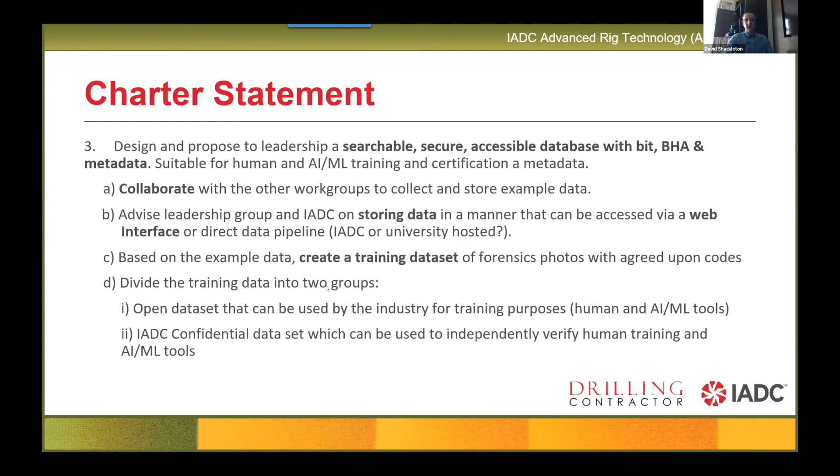So this group, the data management group, has looked at what the other work groups are putting together and come up with, perhaps not specifications for this training set, but at least some considerations that we need to bear in mind. So this is the next chapter, chapter 5 in the guidelines document.

What would this training data set look like in terms of structure? How would you give permission to access this data? Different roles of different people from different companies, perhaps. How would this data training set be integrated with other systems like email or other databases potentially?

There needs to be some kind of arbitration if some people think there's some data in there that maybe should not be in there, or perhaps they put some data in there that they later decide didn't want to be in there. What's the process of perhaps removing it or doing something else with it?

Data ownership, who owns the data that is in that training set database, or perhaps rather than who owns it, who can do what with it? Data access, how can it be accessed securely? How can that access be controlled securely? And so on and so on. Considerations to take into account here.

And then at the end, we acknowledge the work of the different authors and contributors to the group, not just in terms of putting together the documentation, but in terms of providing input at the meetings and doing presentations and so on. And at the end, there's quite a large appendix of terms and definitions, which can be pretty useful for learning from or referencing, and then a list of abbreviations that we've used at the end.